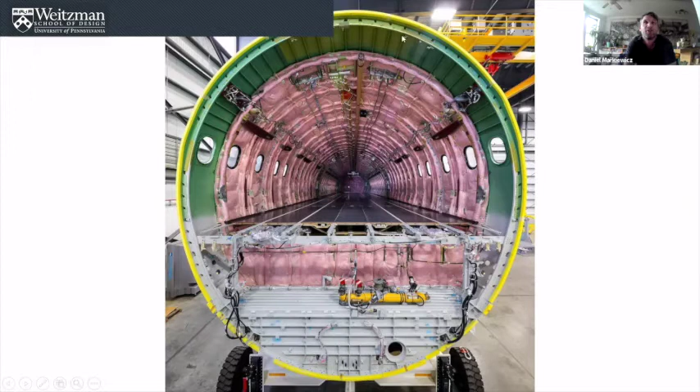I'm very excited to have Vish today. I'll give a very short intro for everybody, but Vishwadeep Deo is a senior associate and facade designer at Front Inc. Front, for those of you who don't know, is a world-renowned facade specialist organization that brings a cross-disciplinary collective approach of architects and engineers together.

Vish has more than 18 years of construction industry experience and has been lead design on a number of projects, lead facade design from cultural, institutional, transit, residential, all over the world, North America, Europe, Asia, everywhere. I'll name just one or two here, but there's a long list of projects that he's been involved with.

So a couple: the Ronald O. Perelman Performing Arts Center at the World Trade Center in New York, the Google campus in Mountain View, with BIG and Heatherwick Studios as the architects. He worked on Barclays Arena in Brooklyn, as well as the Mercedes-Benz Futures Laboratory and Museum in Stuttgart in Germany. Before Front, Vish worked at the Digital Design Group at SOM and the Digital Fabrication Lab at Georgia Institute of Technology in Atlanta.

And Vish combines practice with teaching. He's taught with my studio, and I've been very, very lucky to have him for the last 3-4 years. He also consults at Tulane University. But that's the quick intro for Vish.

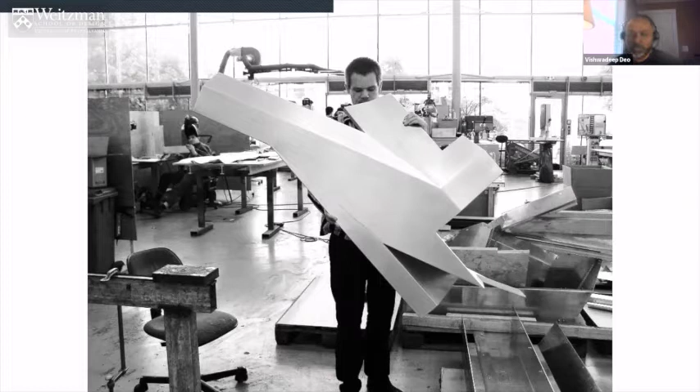For this particular presentation, I wanted to select and use three different materials, very simple, very straightforward, we know them, but used in a slightly unconventional manner. And just to understand why we are using them, it's a story of these three materials for these three projects, to track why it was important and how the design intent from the design studio distilled the selection of the material and how we processed it further to the actual realization. Of the three projects, one has been built, one is unbuilt, and the third one is currently under construction.

Starting with the acrylic, the project is Park Avenue Plaza in Midtown Manhattan. It's a public arcade. It's a through block, sort of an interior condition. And it was a very unique project for us because we typically work on the design and engineering of the facade, but this was completely interiors.

It's a building that was designed originally by SOM in the 1980s, and the public plaza was definitely used to a large extent, but it was definitely in need of some renovation. So Janson Goldstein were the design architects who were called in by the client Fisher Brothers, and on their recommendation, because we had worked with them previously, requested us to join them as glass and acrylic consultants.

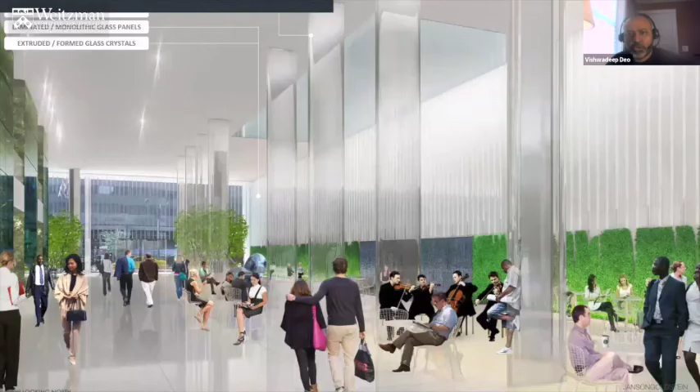This was the first brush of what they imagined the space could be. They wanted to not only have a band of opaque glass wall, which was purely a cladding onto an opaque wall, which had these vertical tubes that were infilled with acrylic light fixtures. But this presentation will focus primarily on these 8 columns. They were very clear sheer columns, purely used as an organizational tool and a decorative element. They were not structural.

And it was very critical to translate this design vision into an actual construction of this particular piece, because there were a lot of drivers that drove this design concept. One, not only organizational, but it needed to be as transparent as possible, something the city planning code requires all arcades to have, so as to minimize any visual obstruction. So the decision needed to be made. These were about 30.5 feet tall clear columns.

And our starting point was, what material should we make it out of? Two options were glass and acrylic. For both of them we had sufficient experience, more of glass than acrylic. After working on Jane's Carousel in Brooklyn, we understood the material. We knew what it could do. We knew its benefits and drawbacks. So we started to take that forward and really distill what that material could be.

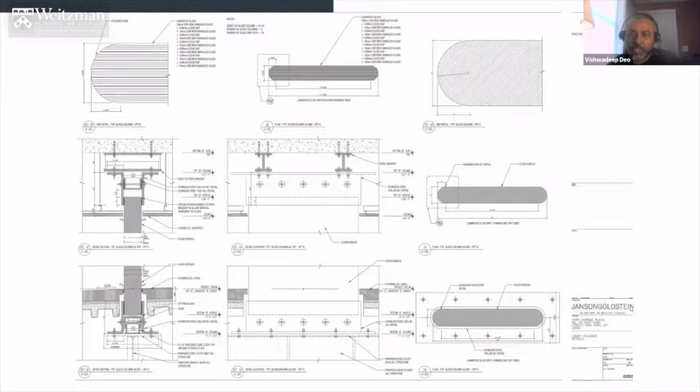On the top left corner, you could see the laminated glass version. That's how we would have built it if it was out of glass. And on the right was pure acrylic. We also looked at reducing the weight of the glass, because the biggest constraint for the glass was not only how we could fabricate with these multiple laminate plies, but also the weight. Just the logistics to erect 30 feet tall columns, which are about 5,000 pounds, would have been a tall order. So we started to excavate the material out of these columns and tried to figure out how we could actually build it in glass.

Quickly we realized not only was the weight acting against us, the glass with the multiple laminates and interlayers, and the edge treatment, was not as clear as we would have wanted. The fabrication of those multiple plies at 32 feet length would have also been pretty tough. Installation would have required a special jig installed in place to install these columns. Maintenance wise, the glass was actually better. Acrylic tends to get some scratches, but it can easily be maintained.

What we faced an uphill battle for with the acrylic was the fire code. We knew that acrylic, being a plastic, definitely was not a non-combustible material. It had lower performance compared to glass when we speak about fire performance.

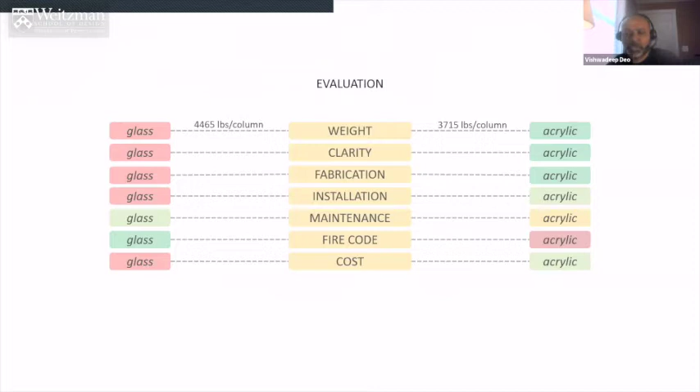Cost also was much lower, or slightly lower at least, for the acrylic. So for us to address and install the material, our task was straightforward. We need to address the fire issue. We teamed up with the fire department, and they collaborated with us to go through and distill down what it really means to use acrylic.

They looked at code, and because it was non-structural, we were able to define it as a decorative element. And for a decorative element, according to 2008 code, it needed to be class CC2. And we tested it, and based on our testing, CC1 and CC2 criteria was applicable to acrylic. So for us to classify that material as class CC2 was critical. And we actually were able to get there, and we did it.

And I think that testing was then brought forward in front of the New York City Building Department. I think everything went okay, and they approved it. One was a system design of how we are actually attaching and supporting these acrylic columns. In addition to that, they also required special sprinkler heads just adjacent to the acrylic. No combustible material in the lobby, no furniture with any higher burn characteristics were allowed. So everything is metal, non-combustible around these guys.

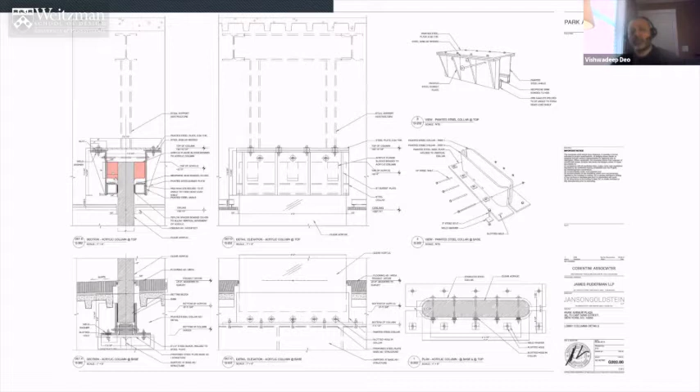So what they wanted us to do is figure out a solution in case the base gets compromised. So we came up with a system where we allow the vertically slotted connection at the top, but also have these nodes or tabs that allow it to be top hung if the base is compromised. And once we got that, we got the CCD1 code clearance from the building department. After that, we were just off to the races. We went through the normal bid process and the supplier qualifications. And ultimately, the production of these acrylic columns went to Reynolds Polymer out of Grand Junction in Colorado.

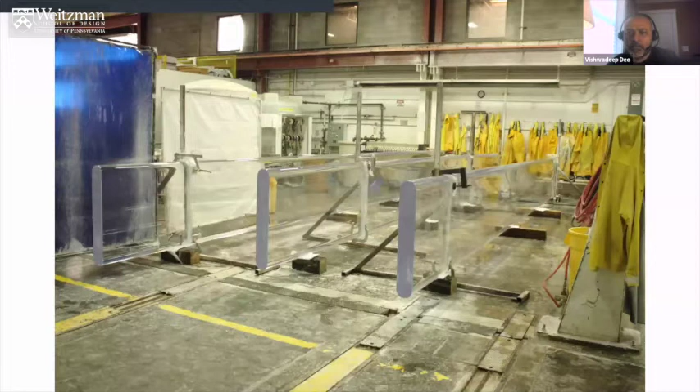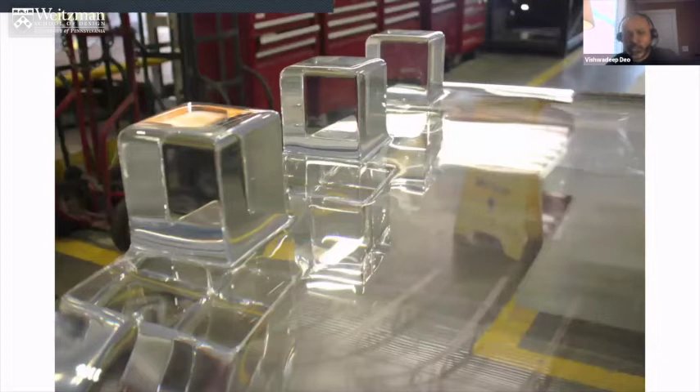These are some images from the fabrication. Most of these acrylic columns are first machined using a 3-axis CNC router. Then they are polished and cleaned. Then the tabs are added in a large oven using a chemical bonding agent, and under pressure and heat, it bonds to these acrylic columns. And after that, it is all polished together. Any defects are worked away with a cement grinding agent.

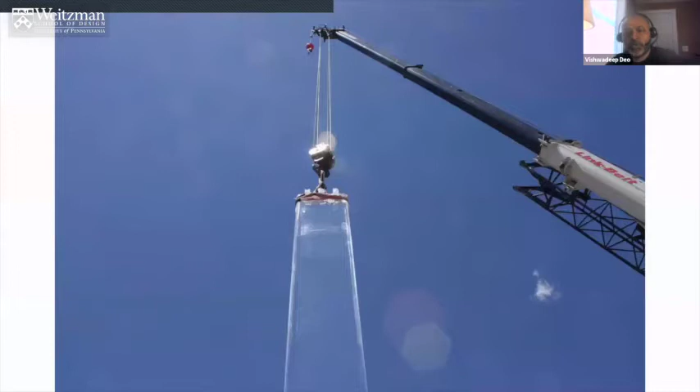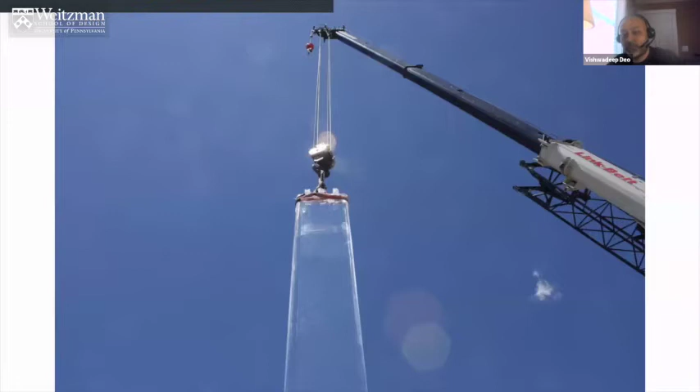We were able to undertake a factory inspection for general QC purposes. We checked the actual tolerances of these columns. We looked at their thicknesses. We were able to empirically hang these columns using those tabs and actually test those tabs out. Are they able to take the load or not? We hung them for quite a while and it was sufficiently stable. There was no effect and the bonding agents worked perfectly.

We were also able to look at the clarity, going from pure rendering to actually this. For us, it was pretty convincing. It was very clear. There were some optical distortions at the edges, but otherwise it was super clear, as you can see in the images. These are some images from the actual installation in the lobby. The columns are brought in place and they are hung up on the right-hand side.

All right, on to the next station. This is steel, another well-known material, but used in a slightly unconventional manner. This is a project not far from UPenn. This is just outside of Philadelphia in one of the suburbs. This is a project that a friend had worked on previously. It's a private residence and the owner actually owns a private gallery as well.

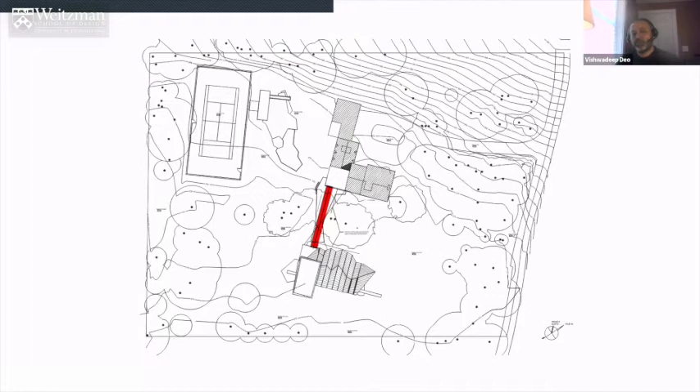So the bottom part of this picture, just below the red bar, is that gallery the friend had worked on and helped with the fabrication a few years before this project. This is that gallery. And the connection that you see here is from the residence to the private gallery there. And this is the site of this project.

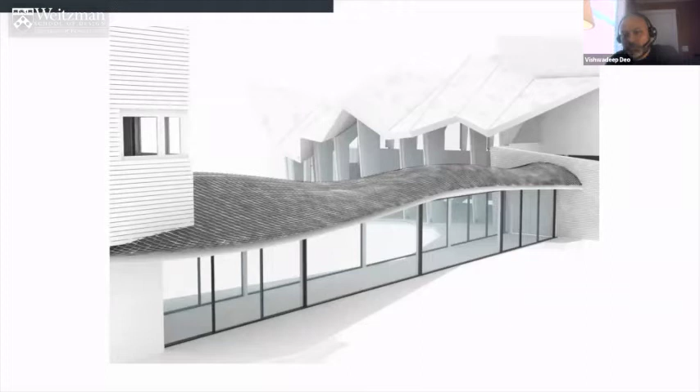When we were brought onto this project by Point B Design, who you may know, he's a Philadelphia regular, this was the initial sort of cut on what he had envisioned. Speaking of John Shields, this was a connecting piece. It was sort of imagined to be an extension of the gallery. So when you enter from the residence side on the left, go towards the gallery, this should appear and behave exactly like an extension to the gallery.

So it needed to be super clear at the base, and the client was driving this process and is one of those guys who really wanted to see something special here. So we jumped in and we started to look around and there were a few constraints that we actually had to navigate through to actually make this.

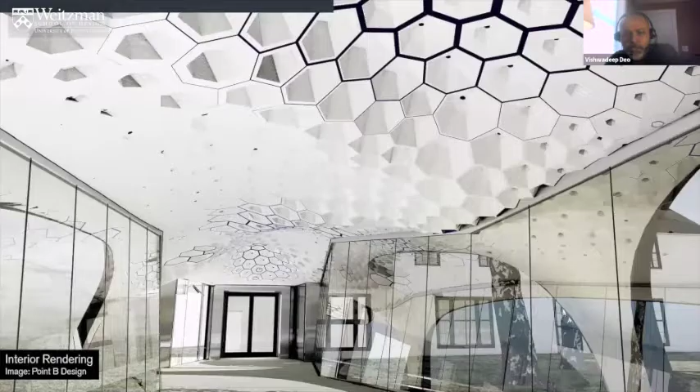This is where we started the project. The status of this is currently unbuilt, but the progress from here to here sort of gives you a little picture of what went into realizing it, or at least to a point where it could have been realized. An interior view of the bridge.

Speaking of constraints, we were faced with an extremely short timeline. We had to sort of go from design boards to execution in quick time. We understood from the architectural design intent that the design surface that actually governs the geometry, we do not want to change that, or at least not to a large extent. Some optimization was possible, but changing the geometry was not, because the ground plane itself is an environmentally sensitive site, and we wanted to touch on that site at a very specific location

and not anywhere else. In general, we were looking at a free-form geometry, so whatever system that we could envision and test should be compatible with a free-form geometry. The whole system needed to be as close as possible to a continuous surface. There was limited site access. So whatever means we define the system, it needed to be easily transportable to the site.

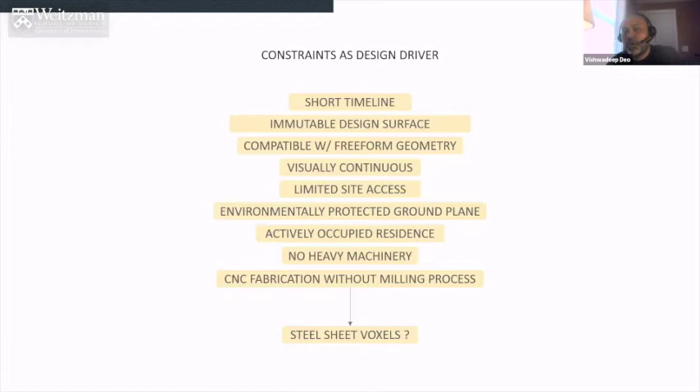We should also keep in mind that the residence will be actively used, so no heavy machinery was to be allowed during the execution of this project. We understood we had access to CNC fabrication, but there was no milling process. So those were the limitations that we were working with. And after deliberations, we sort of arrived at this concept of steel sheet voxels. So three-dimensional voxels made out of steel sheet.

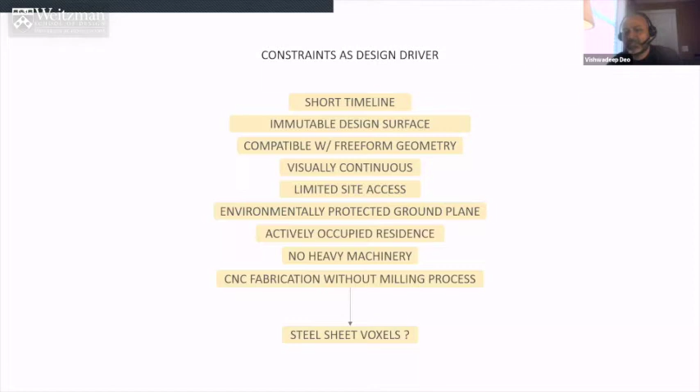This was a starting geometry. This was one continuous surface which touched down on either side, one side on one and two sides on the other. So it was sort of a three-sided tripod surface connecting the residence to the gallery. We started discussing it. How do we actually skin this? What sort of structural system should we use?

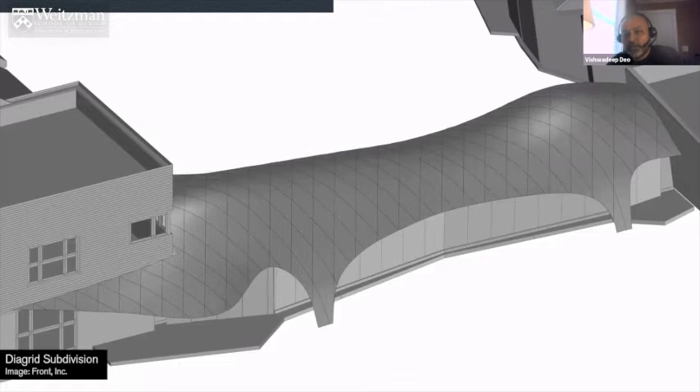The first step was the most straightforward, to use a UV division of the surface to arrive at a grid shell. We looked at diagrid. Then we arrived at circle packing and sort of an approximated polygon mesh. And this seemed interesting, a lot more texture, a lot more character. It sort of fit a lot of bills.

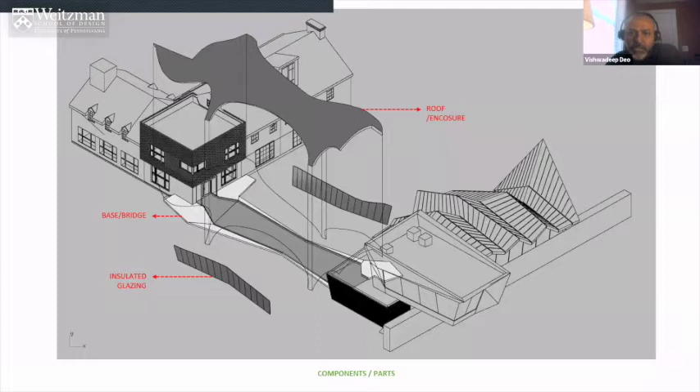Then it came down to how do we actually execute, or what is it exactly if we do actually panelize it like that. The image here sort of indicates the three big components. You have the base bridge, you have the top and roof structure, and you have the inclined insulated glazing.

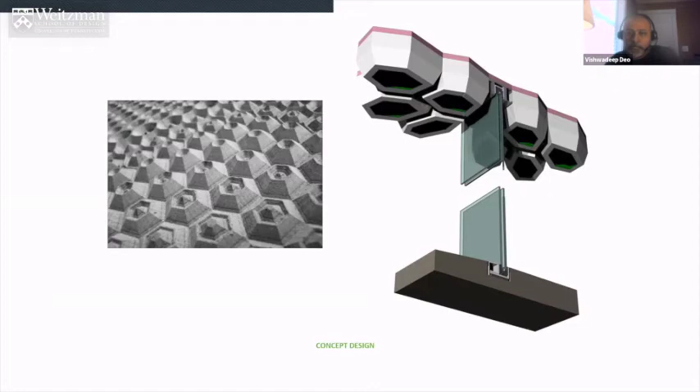To go back and look at the actual geometry, just a layering of it from exterior to interior, most of the thought process on the exterior tiles was much in play, but we were looking at some sort of an exterior tile with waterproofing and insulation underneath that, on top of the structural voxels. There were these additional pieces, honeycomb cavity zones inside, called the visual voxels, we were calling them. Sort of an interior finish applied to the underside of this surface.

In addition to that, there will be inclined glazing on either side, regular insulated glazing units, base supported, top supported with no framing, and then at the base was the slab. Detail of how things would come together. This is cut in a transverse section, looking at the exterior, going through the waterproofing insulation, the structural voxel, and the inclined glazing at the base.

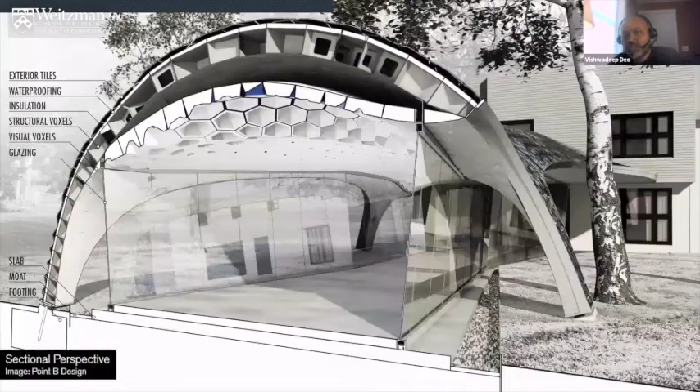The key part of it was most of our work revolved around analyzing it structurally, what it would mean, this aggregate that we are creating, how do we analyze it, how do we understand it. As you can see from the geometry, it is somewhere between a portal frame and a shell structure. And it existed between these two structural diagrams.

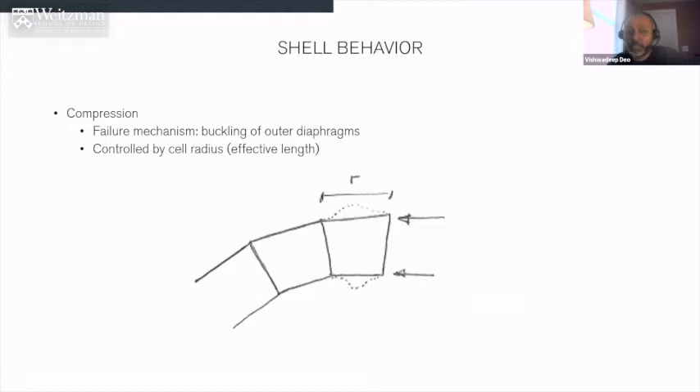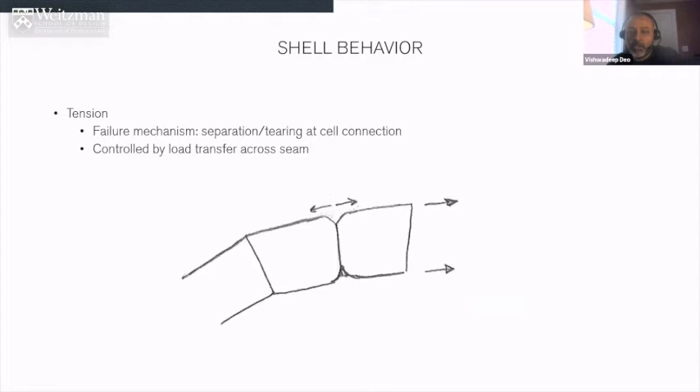We understood the shell behavior. We understood what happens when it is compressed, what the failure mechanisms are, and how you control it. For instance, in compression, you would see some buckling, and you can control it by reducing the actual cell radius. In tension, you would see separation of the fasteners that are connecting these voxels together, and we could improve it by improving the load transfer between the cells. As far as bending is concerned, we could control it by increasing the depth. So those were the building blocks of what this structural diagram could imply for the voxel aggregation that we are creating.

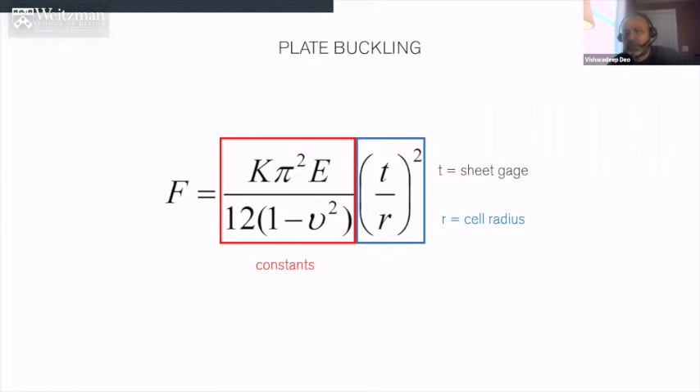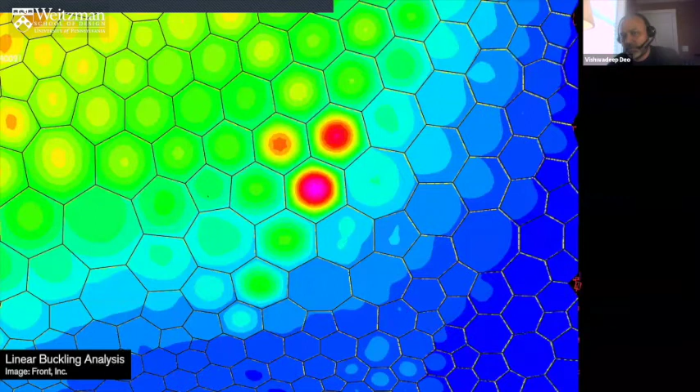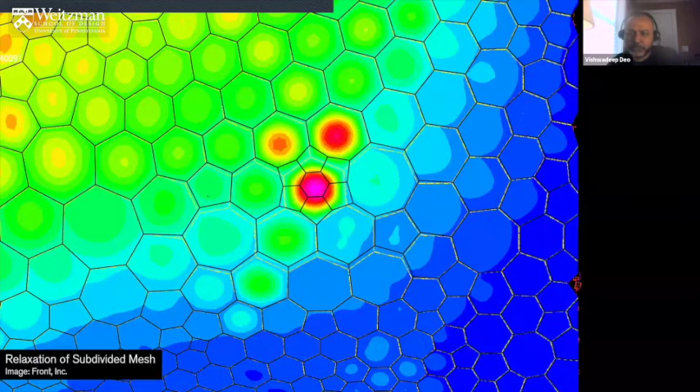Looking at compression a little bit more, when you compress it, the voxels made out of sheet metal would undergo plate buckling. And based on our analysis, we were able to define what that plate buckling could be for each of these voxels. And at these hot zones where we were seeing a higher concentration of buckling forces, we were developing a script that could automatically address that, either by subdividing the mesh further, reducing the radius of the cell and increasing the buckling capacity for each of these cells. This is after subdivision.

And then to go back here, the main question was how do we actually generate the initial... We understood the buckling concept, we understood the shell performance under the loads and the failure modes. But how do we generate a map of these voxels and what should the logic be? We looked at meshes, and that's how we were going to progress on these surfaces.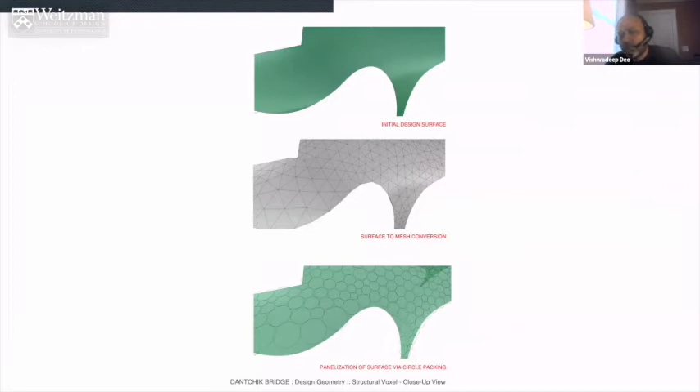There was a starting surface, which was a pure surface coming from the architects. And then we were converting that to a triangulated mesh. And then using that mesh, we deployed circle packing techniques. And once we had that circle packing, we were able to adjust the mesh and relax the mesh to arrive at a polygon which was reasonable based on certain rules.

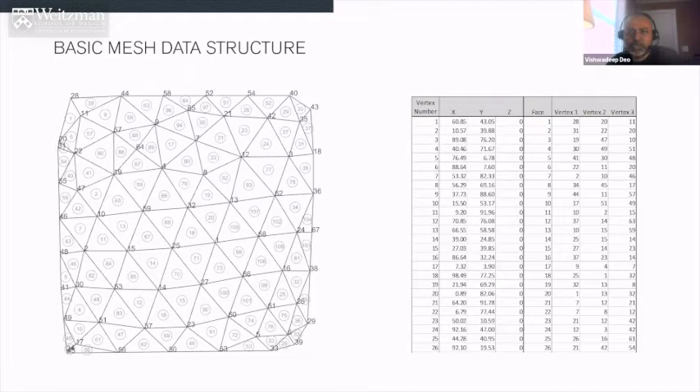All along when we were developing these geometries, the basic mesh data structure was kept intact: obviously, the cell and the vertices, and also the chords. The exact mesh that was getting generated based on that analysis was imported directly into a finite element modeling software through a localized plugin that Front had developed.

Again, some of the basic data structure that we understand a particular mesh to have: you have the concept of half edges, which is a shared edge. You have the face, the vertex, and the concept of next chord.

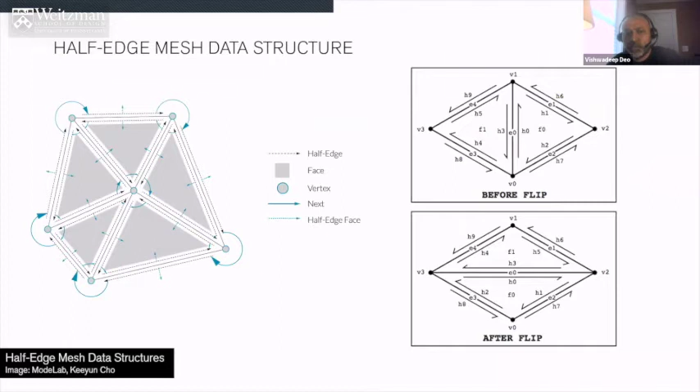And using some of the mesh manipulation techniques, we could analyze which elements were too long, and we can actually implement flipping, for instance, to reduce that length. We can also look at subdivision, like what you had mentioned previously.

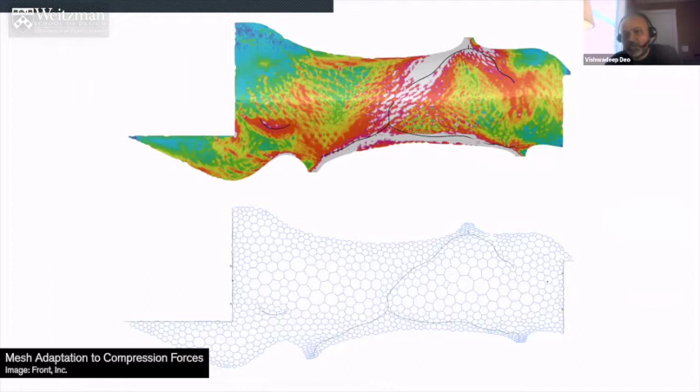So when we had that initial surface, the first step was to analyze it for compressive forces. We just took it into Strand7 and then analyzed it, assuming it's a small thin shell concrete, just to create a map of compressive forces. And this compressive force map actually drove the cell aggregation that you see in the bottom. So the cells were smaller where the compressive forces were higher, and these were all auto-generated based on the loading map diagram.

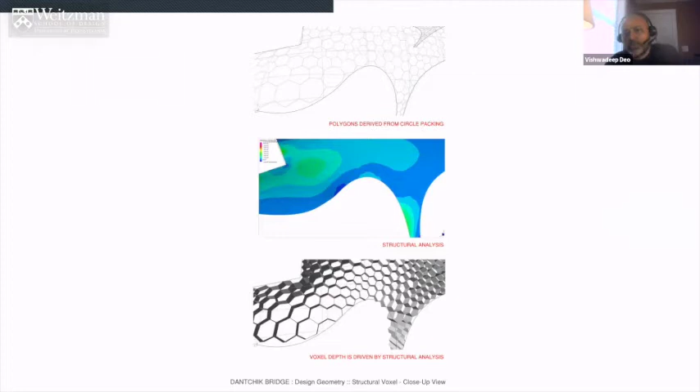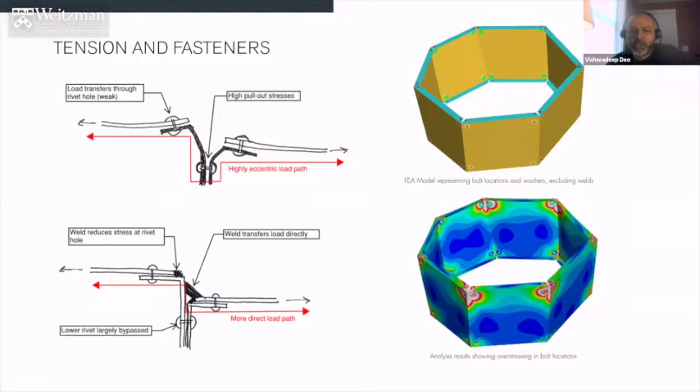Going from the cell geometry, we basically manipulated the depth of these cells as well. And these are some of the permutations that were generated from the script based on different input parameters. Speaking of tension, the acting forces on the fasteners as a cause of splitting, we looked at how we can actually create an easy transfer of load between two cells, and we looked at spot welding some of these elements.

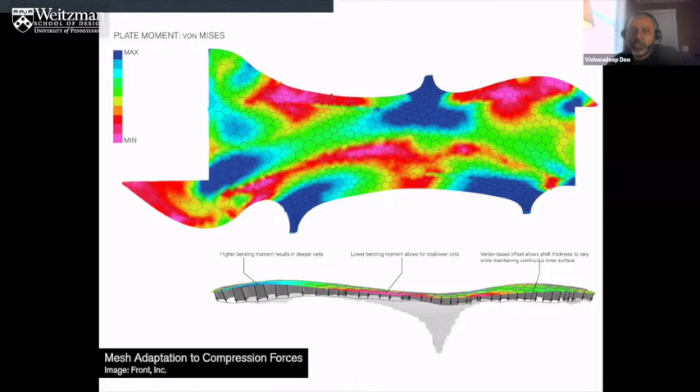Looking at bending again, as previously noted, the bending forces are effectively controlled by increasing the depth. So the other rule that was embedded within the script was to increase the depth of these voxels based on where we saw maximum bending moment. There was a bending moment map, and it corresponded to the depth these voxels were designed for. So higher bending moment implied deeper voxels. Lower bending moment were a little shallower cells, and the vertex-based offset allows shell thickness to vary as well. We could go and manually change some of these elements if you wanted to.

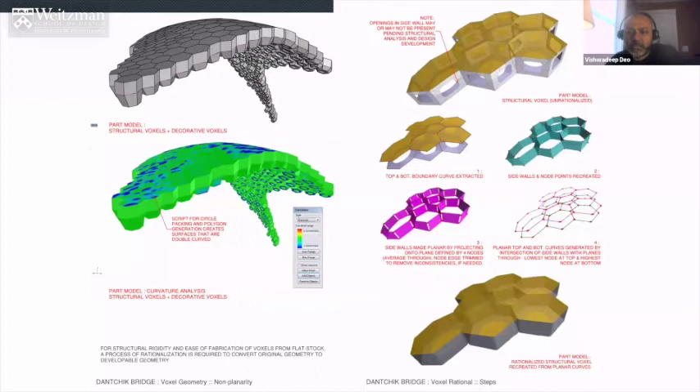Based on the initial geometry, subdivision, circle packing, and subdivision of the polygons, the resulting geometry is a double curved surface, which could be an issue if you're just dealing with straightforward sheet fabrication. So we needed to undergo a little bit more rationalization of the geometry. And going from the left image here to the right, it basically created certain offsets between each cell as each of these surfaces were rationalized as a planar geometry.

Once these voxels or three-dimensional cells were generated in the computer software, we understood that they were based on the bending moment diagrams. The depth of each cell was based on the bending moment. The circle packing was based on the actual loading map of a concrete shell. But we wanted to bring that final model back in and analyze it as a separate second engineering process. There were two types of models that were generated. One was discrete and one was continuous. The discrete model was primarily used to check fastener sizes and compute deflections. And the continuous model was to analyze the buckling forces.

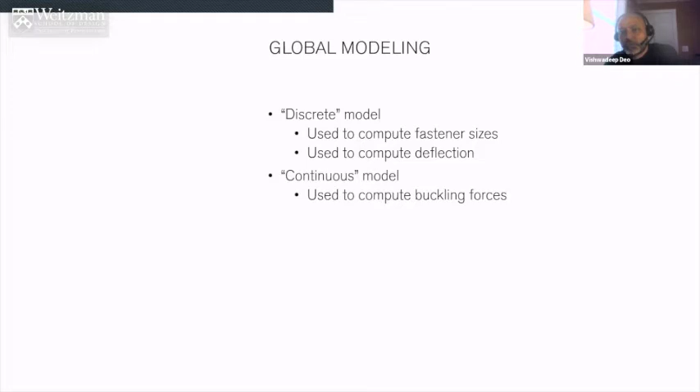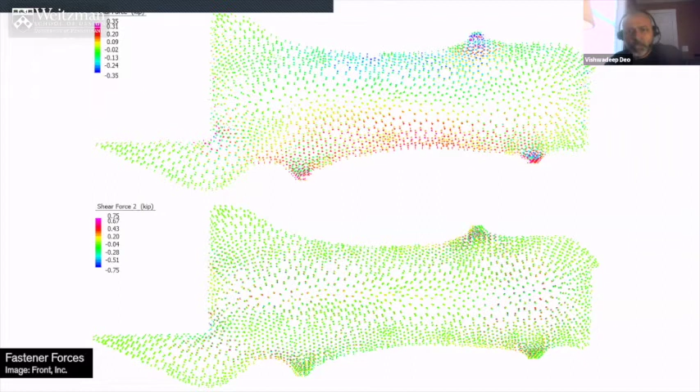This is the grouping of individual discrete voxels. Some of the fasteners being modeled. And using the model, we were able to zero in on each and every fastener and the type of force or the actual quantity of force acting on each of the fasteners. We could see which were actually getting overstressed, so we could address them or increase particular cells. This allowed us to look at the buckling forces, how the loads were getting transferred between the cells, which were,

Are you guys able to hear me? Yeah, we can still hear you. It's a little choppy, but we can hear you.

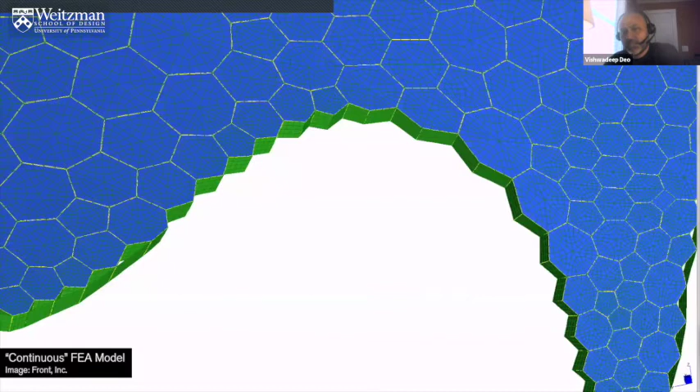Okay. So the continuous model allowed us to look at buckling forces specifically. And what it did was generate a load map, again based on these buckling forces, that allowed us to zero in on each and every cell that was actually exceeding the limit of those forces. We did some back-end calculation to arrive at the buckling constants, which were not available, obviously, for this sort of bespoke system. That allowed us to generate these buckling force maps and identify the hotspots as far as the buckling forces are concerned.

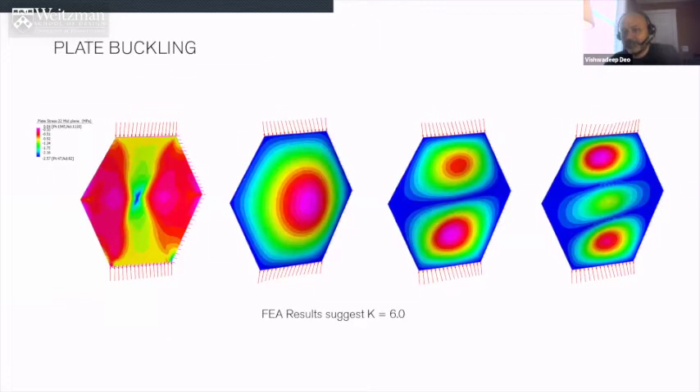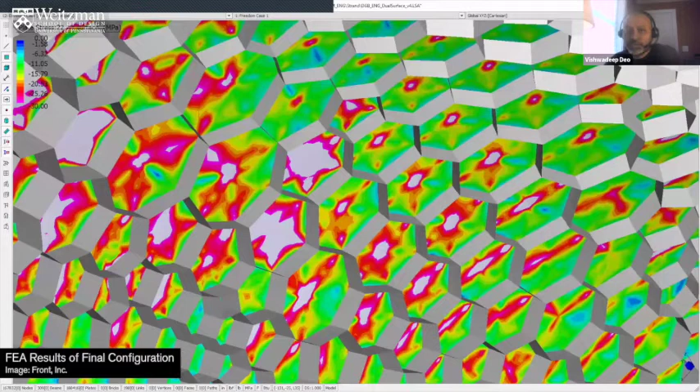And what it did was it allowed us to isolate those cells in particular and call out those cells for additional reinforcement, either increasing the gauge of that sheet metal or having some sort of additional reinforcement at those cells.

Where we left the process, where the client decided to hit a pause button, we were starting the next phase of iteration. The intent was to start to see how we can integrate some of the systems into these cells. We were looking at the air distribution system through these voxels, how they can all exist together in the skin-activated system. So very much like a monocoque system for the Airbus 320. All the systems were integrated into the skin of this particular project.

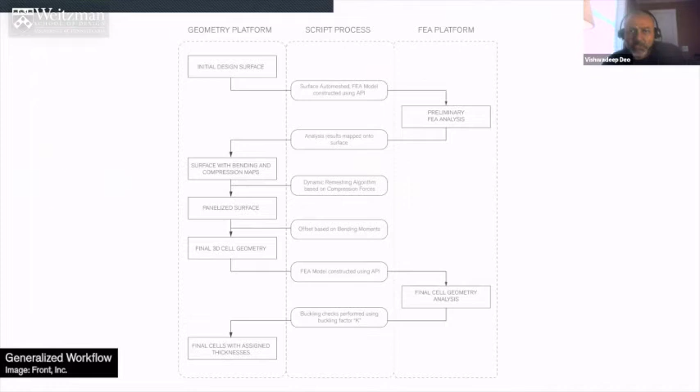Just a recap of where we were and the steps that we followed. There was an initial design surface. We took it to finite element analysis to analyze and map out the results for compressive forces. That allowed us to generate a circle packing mesh and create a hexagonal polygon mesh on top of that surface.

Then we analyzed the bending moments, and that input provided the depth of each of those cells. Once those cells were generated, they underwent one round of rationalization for planarity of those surfaces. Those surfaces were then brought back into the structural analysis software to analyze them in a discrete fashion and a continuous fashion for final validation and check on the fasteners.

During the course of this exercise, we started using a suite called Elefront, which is a custom Grasshopper component that Front has developed, which does a few things for us as far as facade design engineering is concerned. What it specifically does is embed the geometry with a lot of information that you can extract and use the way we want to.

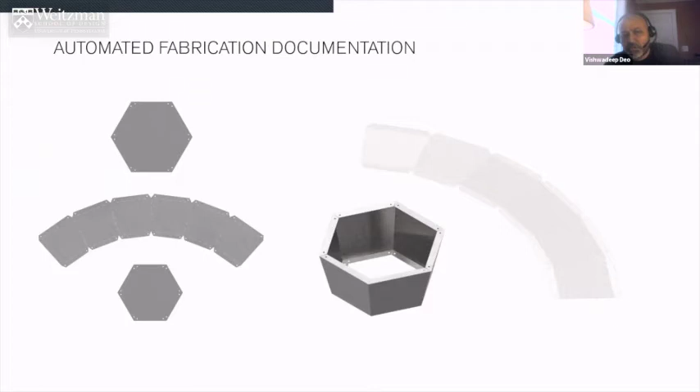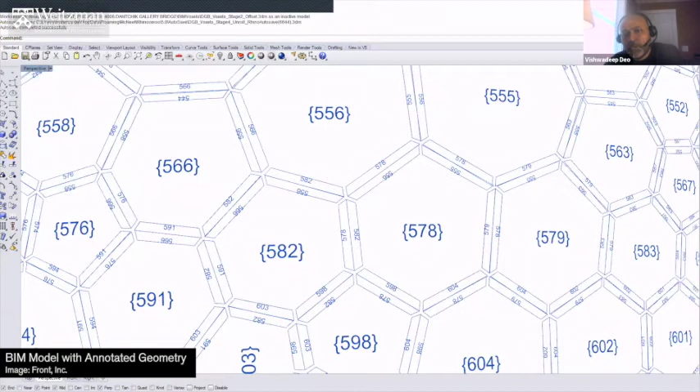The other benefit or feature that we embedded in that component is auto drawing generation. That allowed us to generate each and every component automatically and also tag it with a unique ID. These are some of the pieces. We looked at auto nesting on a sheet as well, and all the parts getting generated.

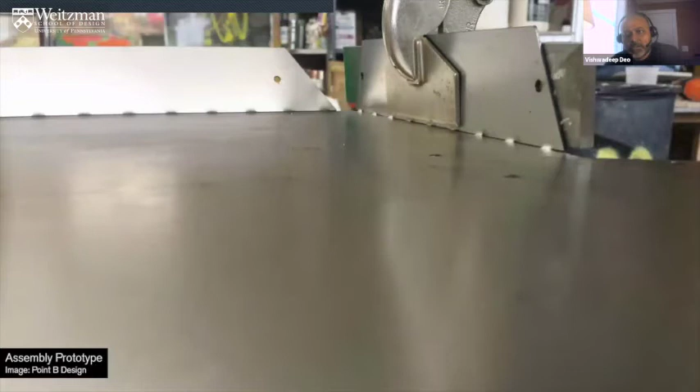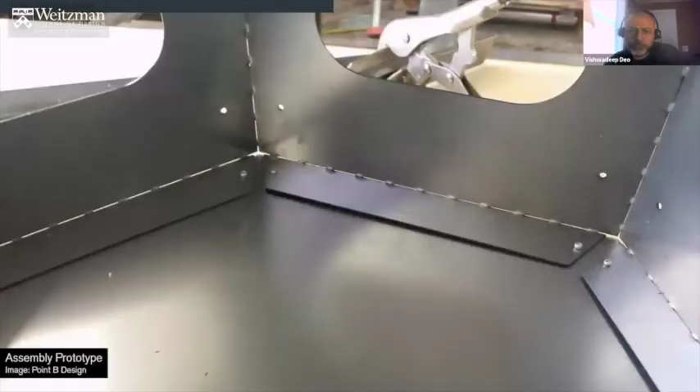Some of the construction images of a mock-up. This was all done in-house at Point B studio. Rivets being used as fasteners. So you could see, to bend these plates, there were cuts being made intermittently that allowed them to be folded.

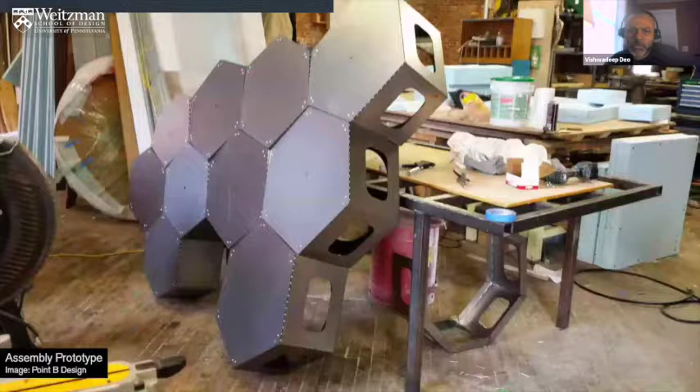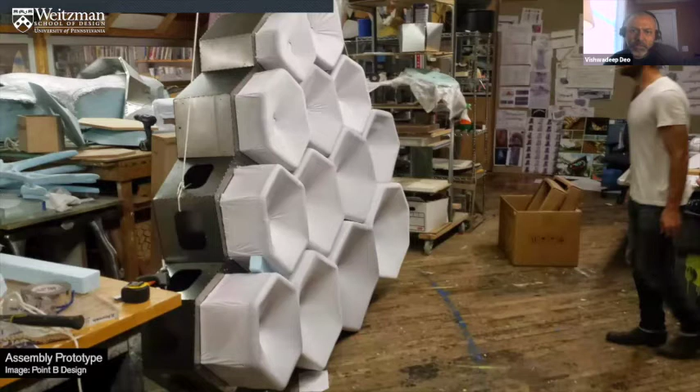You could see, because of the planarity of the surface, there's a slight deviation from the adjacent cell, and that's what you're seeing here. Some concepts being tested for the interior finish, or the visual voxels or interior voxels, as they were called.

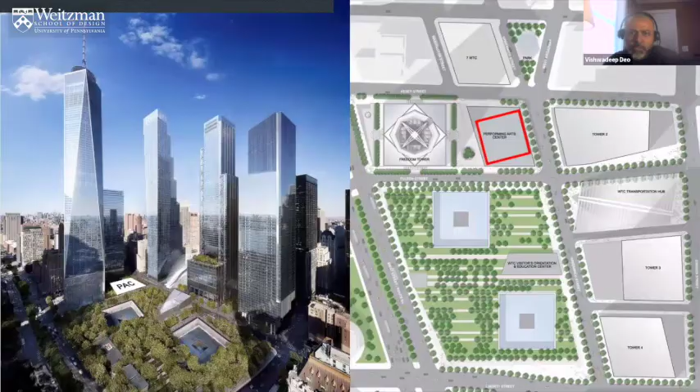All right. So we are going on to the third project. For this, we are going back to New York, and we are at the World Trade Center site. This is the last parcel that is getting developed after 9/11, after the master plan was approved. This is the Performing Arts Center that has changed hands over time. For us, it has been a long process, but the actual process has been much longer.

As the main caretaker of the Performing Arts Center changed hands, there was a switch in where they wanted to take this Performing Arts Center design. They floated a new design competition, and REX were invited in 2014. And REX invited Front to join them in the design competition for this particular project. So our involvement started in 2014. It's been almost 7 years. It's been a long process, but I think we have made a lot of progress on this.

Front, after getting the invitation and working through that invitation cycle for 1 year, we won the competition. And then we had to reapply to be the facade consultant because there was no automatic induction of all the competition participants as the actual consultants for the project. So we had to reapply, undergo the actual interview process, and we got selected to be the facade consultants. Currently, the project is slated to open in 2023.

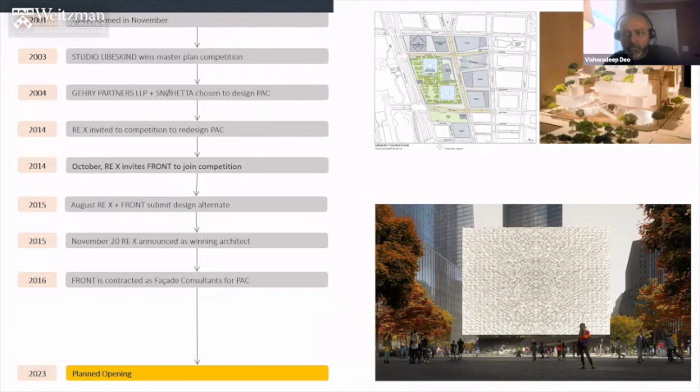The way this project was conceptualized in Joshua Ramus's initial description was that of a mystery box. The intent from the Performing Arts Center team and also REX's team was to create something very unique that leads a user to different experiences and always surprises them at each and every corner. So that was the intent, and the way it was developed as a very forward-looking, modern and contemporary performing arts space for theater, dance, film, and really experimental art forms that can happen in this space.

One of the key drivers why this was called the mystery box was it's a collection of 3 or 4, I believe 4, performing spaces, with one being a rehearsal space that could develop as a performance space, which could actually be combined with each other in several different configurations to create performance spaces of different sizes. And that was, I think, one of the main inventions of this particular device that REX has thought of: this recombination and combination of different performance spaces in different configurations that is allowed within this space.

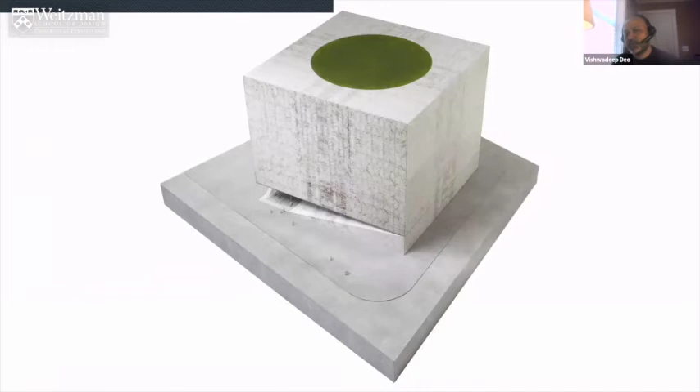As far as the topology and the geometry of the volume is concerned, it was driven by two things: its particular context and the way it faces the 9/11 memorial. It needed to be a little bit somber, respectful to where it is actually sitting, but also very practical, because as we know in New York, there's no bedrock under this building. It's like a maze of different structural systems running havoc. So there were only a few selected points where the structure can actually touch down, and the way it sat on the infrastructure below, this geometry and shape actually became very compatible with those touchdown points. So it worked both ways as far as the overall geometry is concerned.

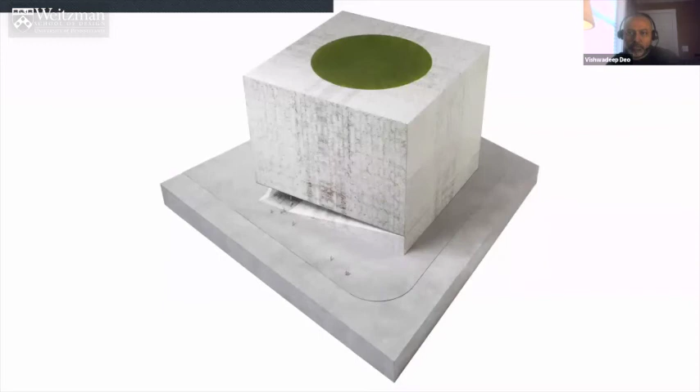The actual building itself, I believe, would be another topic of presentation, but I think we would want to focus on the facade of this particular project and how a material started this whole conceptualization of this facade and where we are today. This is a recent rendering, and this is not just a rendering. The stone texture and the veins that we see on the building are actual scans of the stone tiles that are being fabricated now, and this has been made part of the visualization for this particular project.

This transformation is the most critical property that actually started the project. One of the key aspects of it was to figure out a material, in this case a stone, that could transform with light transmission. It needed to be translucent, it needed to change, it needed almost a phase change from daytime front lit to nighttime backlit. But the backlit also happens during daytime, looking from inside towards outside with the direct sunlight acting on it. So it needed that transformative quality, and then a definite texture of the veins itself. That led a worldwide hunt for the perfect stone that we could actually find. Credit goes to REX in that sense. I think they had a well-defined set of criteria where they wanted to be with this particular project, and specifically with the stone.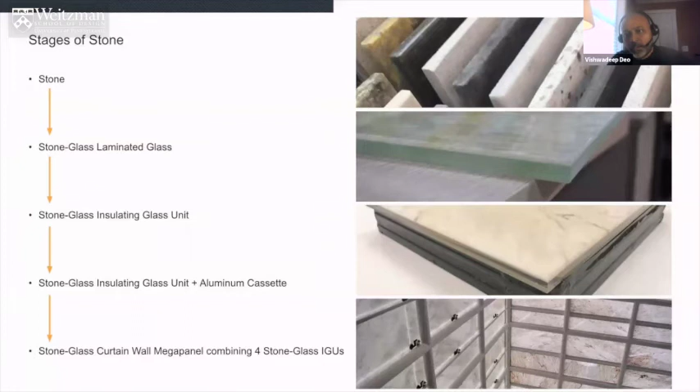We were not starting from scratch, at least as far as the use of a translucent stone material is concerned. The Beinecke Library is a well-known precedent. So is the Pius Church in Meggen, Switzerland. But having these two precedents didn't really give us a concrete stone to go to. When we investigated the Beinecke Library's marble, it came from Vermont, and when we went to check on that, the stone that the quarry provided as being used in this library was totally different than what this library actually has. There was some literature on what the stone is; when we investigated that stone out of the Vermont quarry again, that was completely different. So there was no stone. If there was, it could have been a poetic realization of retouching an American stone and reincarnating it into a new facade system. But we couldn't find the stone, though we knew what qualities we were looking for.

And one of the key drivers for us to search the stone type was its translucency. It needed to turn to amber or gold color when exposed to light. The contrast of the veins was required to be higher because they wanted to convey this texture that they had imagined onto the facade.

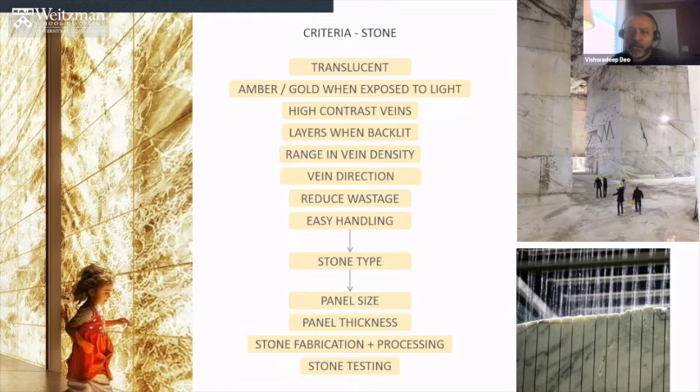The thickness: sometimes when we backlit stone, specifically translucent stone, depending on the thickness, you are able to see the different layers that are being created within that stone layer. The stone needed to have a range in vein density to actually carry the concept through. If it was a uniform stone with a uniform vein, it wouldn't have worked. The vein needed to be directional to actually create a dynamism across the facade as we look up.

Some practical concerns were there because of cost. We wanted to reduce the wastage, and we needed to keep that in mind. We knew we were dealing with marble for the most part, or it could have been an onyx, or a quartzite. Quartzite is a pretty hard stone, but we knew marble is a soft stone, and we needed to figure out the right thickness and parameters to handle it properly.

All these criteria gave us an indication of what stone types or group of stones we should be looking at. That particular stone type would then define what panel size we can get it at. Granite comes at a larger sheet than marble because of its softness. Particular panel thicknesses: the way the blocks of stone are cut into slabs, there's a certain thickness that is more economical than the other. What is that thickness? Can we use that in a lamination process, or do we need to re-engineer that thickness?

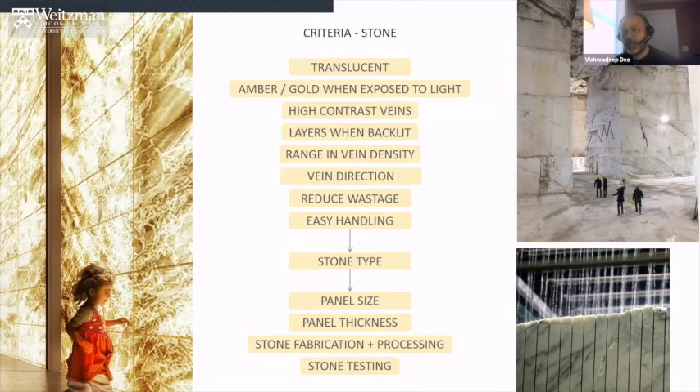In this particular presentation, I think you will see that there is not as much technical information here because of NDAs and so on. So the way I wanted to convey it is the granularity of our investigations into the stone and the other processes, and how the design process went from the material design intent and folded into what's being constructed now. So there was a little lack of information, I apologize for that, but I think our clients would be very happy.

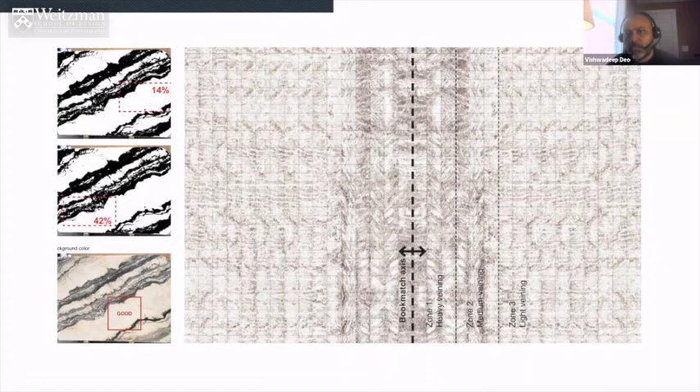Going one step more than just the stone, we as a team had some experience working with stone and glass in a composite fashion. We had worked on the King Abdullah University of Science and Technology in Jeddah, which used a marble with glass as the rain screen system on the outside.

We also worked on LVMH in Osaka, which used an onyx from Pakistan as a sandwiched material on the backlit facade. So both of these were valid projects, Osaka more so because of the climate zone that it is in. It is somewhat similar to New York City.

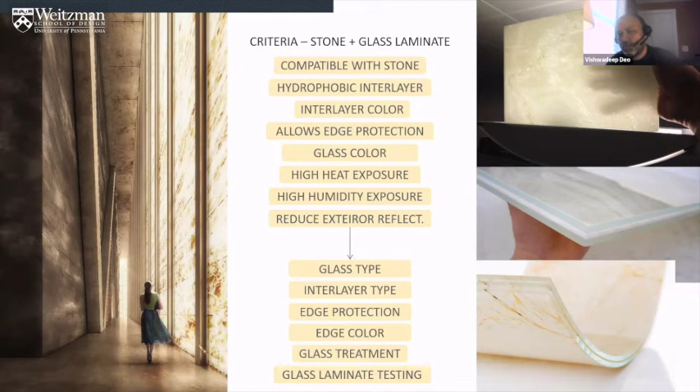Based on that experience, we started to look at what would be the criteria for the laminate itself. We knew what the stone needed to be. What does the laminate need to be? It needs to be compatible with the stone. The interlayer that we are using to bond the glass to the stone needed to be hydrophobic, because we understood marble absorbs moisture, and if there is moisture within the laminate, it will create issues for lamination. So we needed an interlayer that is hydrophobic,

an interlayer that is as color neutral as possible. We needed edge protection in the lamination design. We needed to understand the glass color. We were going for low iron, but within low iron there is a range and some color variation. So we wanted to understand what is the most neutral low iron that we can get. This lamination needed to be resistant to high heat exposure and high humidity exposure for practical purposes.

We also wanted this exterior laminate to reduce the reflection on the outside. When we started this process of creating this facade from the initial design intent rendering, the idea was it needed to be as stone-like as possible. But when we put the stone between two pieces of glass, the natural reflectivity of glass gives it away. We wanted to cut down on that reflection.

So we added a glass treatment, very fine acid etching, to cut down on that reflection. And when we see that glass laminate from the outside, the reflections have gone down quite substantially, to make it look almost like stone from a distance.

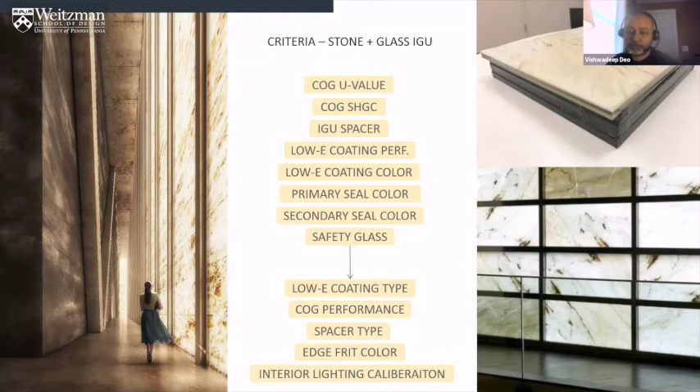This project, like a few other projects that we've done, deployed something called a pre-award mockup, which is a visual mockup or a full-scale mockup that happens before the tender actually goes out, which allows the design team and the owner to evaluate what's available out there as a material and really test it out. We were able to get this before the actual project was awarded to the facade contractor, and we were able to invite and collaborate with 6 other stone glass suppliers and quarries to get 6 options on the table, which matched or tried to match the initial design intent.

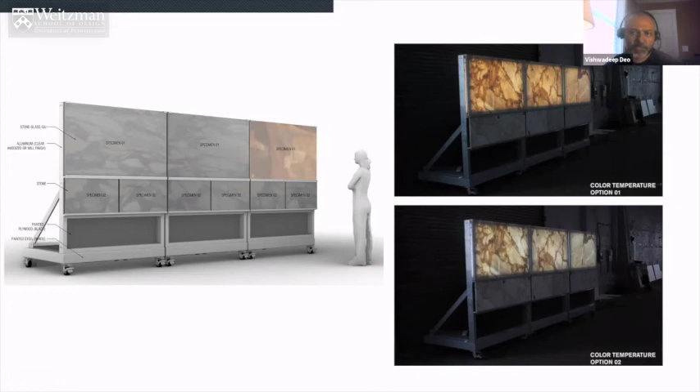And we take one more step closer, going from stone to stone glass laminate. Now we are in the insulated glazing world. We are now actually at the curtain wall level, where we are looking at the actual system design, how the stone that went from stone to stone glass laminate to a stone glass IGU gets incorporated into a curtain wall system, which can then hang onto the building.

So the criteria, like for any curtain wall, were the wind load requirements, the snow load requirements, the seismic event, the impact and live load deflections of the roof, maintenance requirements and how this facade is going to be maintained, thermal expansion and contraction, thermal performance for the curtain wall unit assembly, the fabrication, how we go from stone to actual curtain wall, installation of each of these units, and blast criteria given the site. Most of these buildings have a blast criteria. There's a water barrier for any curtain wall unit; we needed to keep the water ingress to zero. What is the air infiltration? Then the last criteria was the condensation resistance.

What it allowed us to do was to define a curtain wall performance that we can achieve. That became part of our specifications in the tender document. It allowed us to define what performance mockup testing we would need for this curtain wall, and what is the actual facade system design: what are the details at the top, at the base, at the slab, and how they actually terminate at each end. It also allowed us to define what the visual mockup would need to be.

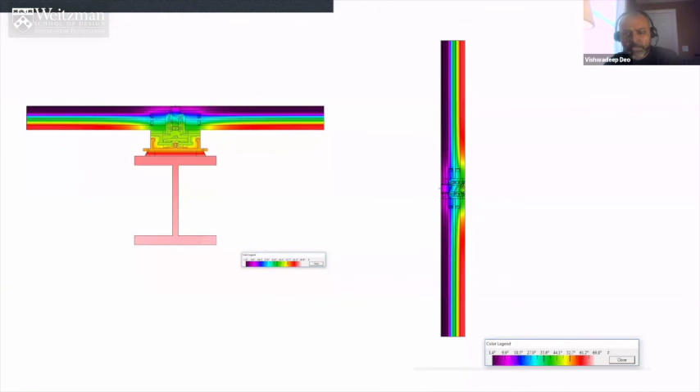The general concept here is, if you see the image on the left, is what it is going to be eventually. It's a long span steel sort of a structure that will get hung from the top all the way down to this plinth level, the total height being about 120 feet. The largest span is about 70 feet. This is the representation of that span. There is no horizontal framing, so the glass or IGU spans from one steel column to the other column.

Some other additional typical structural analysis that we did: the glass deflection and stress on the left, and the deflection and stress analysis for the steel hanging columns there.

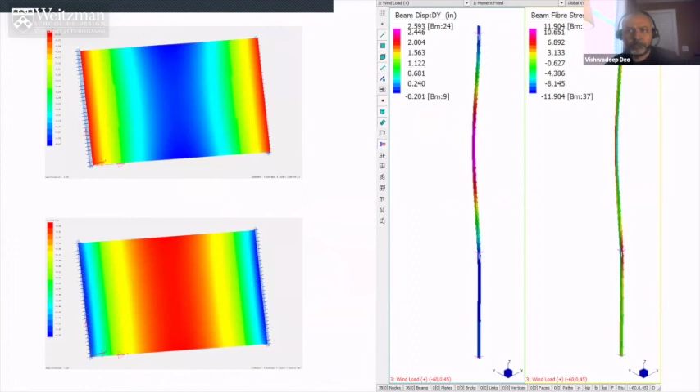There are a few additional steps here because the stone we selected, which is now coming from Portugal, because of the structural capacity and mechanical properties of the stone, needed to be impregnated with epoxy to make it viable for it to be transported from the stone quarry and the stone fabricator in Portugal to Germany, where it is being processed into a glass laminate.

And at the glass end, each tile is then heat soaked, which is basically baking the stone in the oven to evaporate all the epoxy and all the moisture that could be there before the stone lamination is undertaken. At that point, each stone and glass laminate is photographed in frontlit and backlit condition, which is then uploaded to a central database with its unique ID.

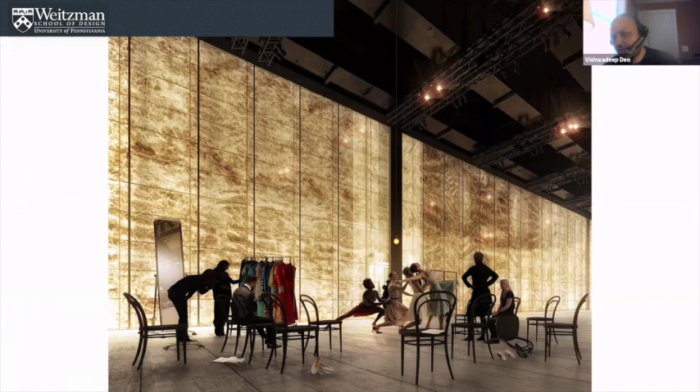Just a quick check on where we started. This is no longer the kind of space that we have in the project. This is no longer the kind of facade we have in the project. But this is where it started, the ambition to take a vibrant and transformative facade, and figure out a material that can do that and take that material all the way to actual installation.

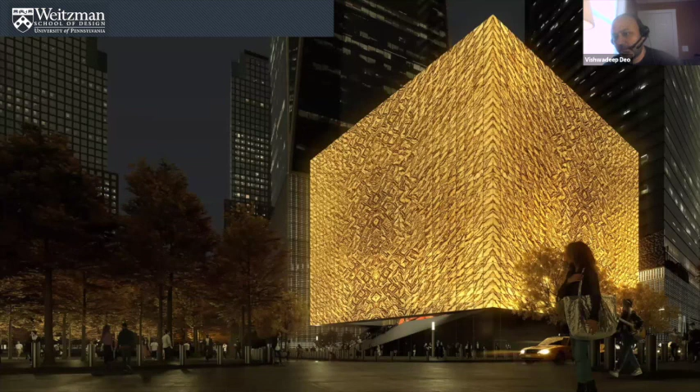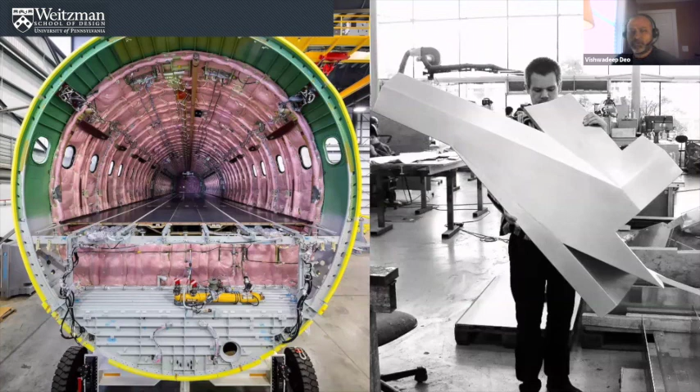And I wanted to take a pause and circle back on these two initial images and re-stress the initial thought that I had, which was the idea of innovation and which industry is open to a cue for innovation, and from which direction, depending on where we are. I think all industries are striving for innovation. So I think it's good to understand there is continuous progress that is being made.

The aviation industry is creating more and more innovative materials every day. So is the architectural industry. But the cues are slightly different. And I think the cue starts with the design and the choices that a designer makes with each of those projects that really pushes the boundary of what is feasible and what has been undertaken so far, and really creates something new and something worthwhile. So I just wanted to flag these two images together to reiterate what I started this presentation with.

And with that, I think that is the end of this presentation.